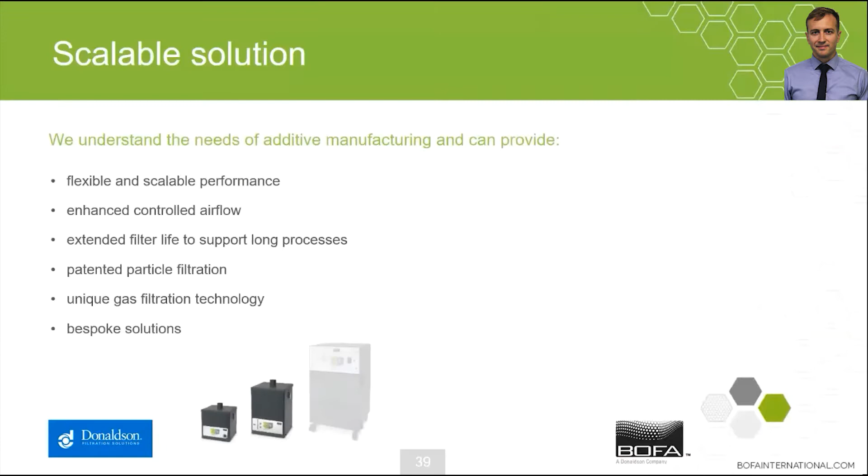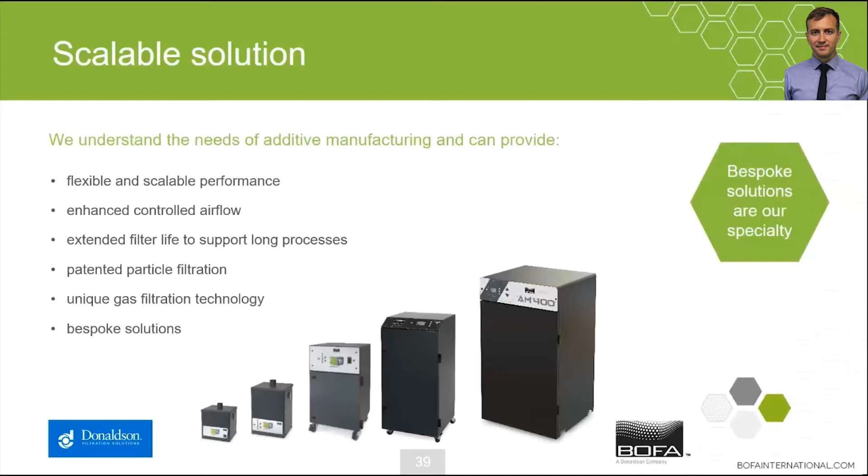So BOFA has a huge range of products which provide a huge range of solutions. We understand the needs of the additive manufacturing industry. Our extractors are currently in the hands of experts and OEMs, to whom they're providing valuable solutions for a growing set of problems. The current range utilizes known technology from our other proven products, such as controlled airflow, patented filtration designs, and the BOFA standard extra long filter life. We are able to offer scalable and customized solutions.

Since we've already discussed the different process types, I'd like to give you a little bit more insight into the product ranges which serve them.

Firstly, the 3D PrintPRO range is designed specifically for the additive manufacturing market. Our patented deep pleat duo filters give extra long filter life against the particles produced, increasing your productivity. The activated carbon technology we produce is best in class for gas filtration, for absorbing harmful and unpleasant odors, with large beds, as Josh has described, to provide longer uptime.

Finally, we are using, where possible, our IQ technology, which accurately sets and maintains gas flow rates whilst delivering an unrivaled quantity of system information, both to the user and any interfacing machine. This consistency in flow control is invaluable for maintaining print quality, keeping the flow regime constant even as your filter fills and the system pressures change.

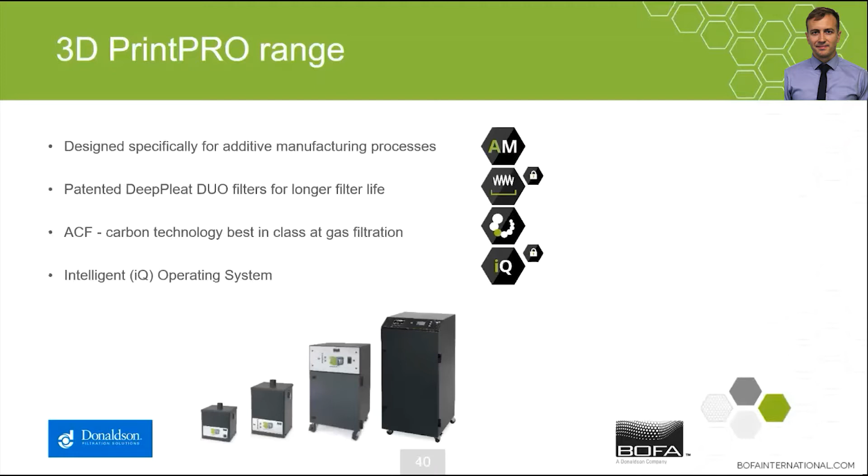The 3D PrintPRO 2 has the lowest flow rate of the range and offers cost effectiveness, a small footprint, and a long filter life. It is best used for open framed printers, as it comes with a specially designed stay-put arm to hang over the printer frame and get close to the source of emissions.

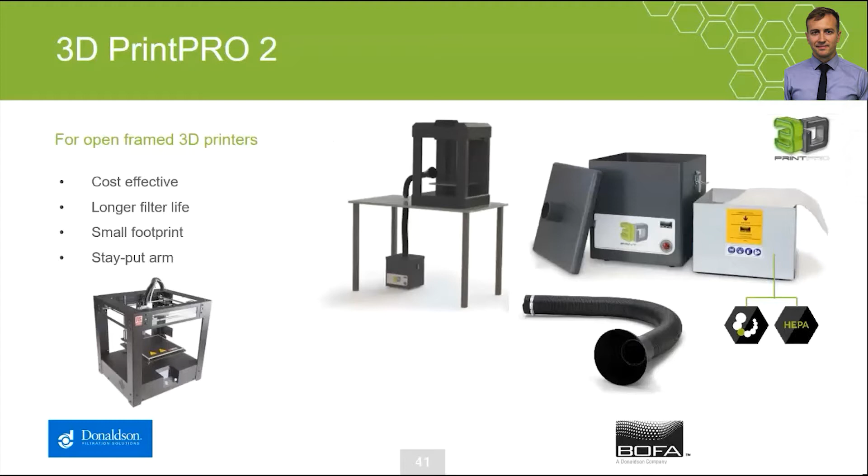Going up a step, we have the 3D PrintPRO 3. This unit is the most common choice for filament-based printing, but can also be used for vat polymerization and other gas-releasing processes. The 3D PrintPRO 3 has speed control, which further extends the life of the filter, and you can add a return spigot for a closed-loop setup that helps keep the temperature of the print chamber steady. It comes with a number of options depending on the customer, and is applicable in the same environments as the 3D PrintPRO 2, but also some larger, more industrial targeted printers.

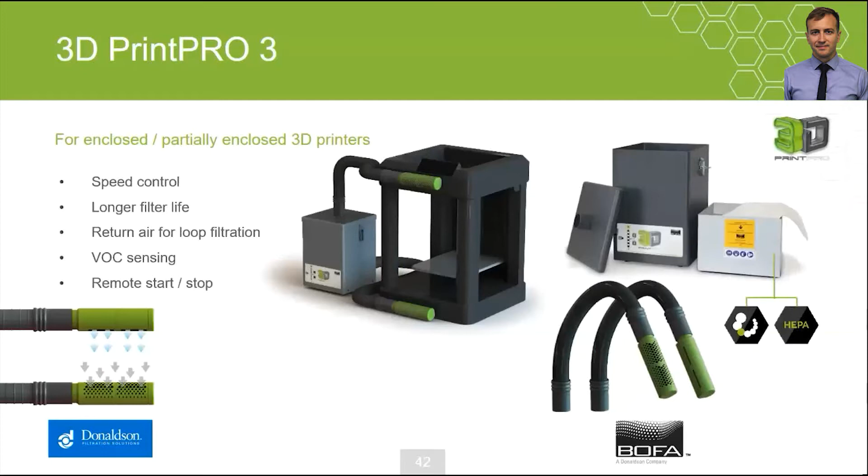3D PrintPRO 4 is another step up. This unit offers the same features as the 3D PrintPRO 3, but is scaled for higher airflow speeds and filter life. This extractor is best used for large chamber printers and high off-gassing processes. So now you are entering the world of high-end industrial machines, with complex prototype parts being created frequently, but also small-scale production printers. Again, this unit will work with most printer types and capture both types of emissions.

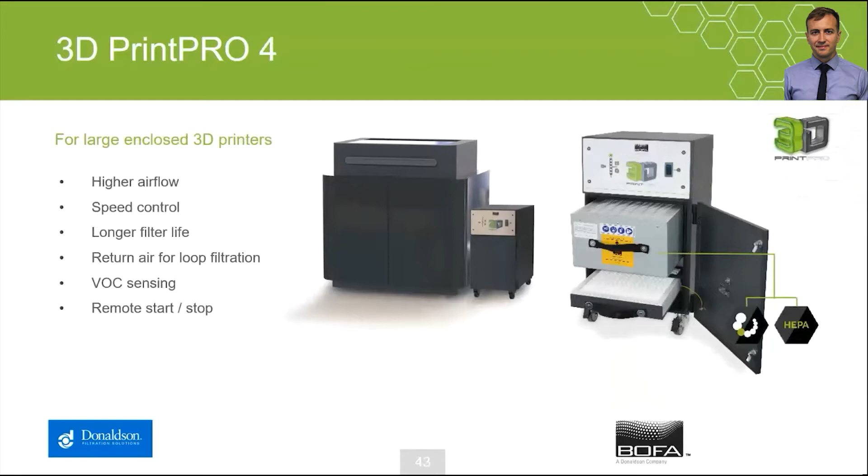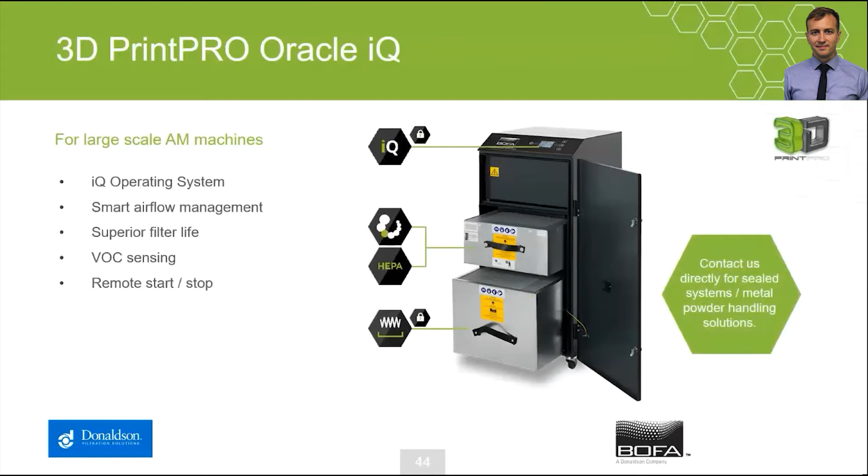Next is the Oracle, our best-in-class extractor. It is the choice for industrial-level additive manufacturing. The IQ operating system and smart airflow management give superior filter life and performance. As previously mentioned, the market-leading IQ control board adjusts the pump speed based on the system resistance, providing a stable flow regime regardless of filter saturation and other variants downstream. It can be fitted with a VOC gas sensor and integrated with the printing tool to optimize the process through use of analog control.

Next up, we have the Fume CAB 1000 IQ. This cabinet is equipped with the same filtration technology as the Oracle just mentioned, but it also adds an enclosure, so one can complete some post-processing of printed components safely in the cabinet, for example cleaning and some light depowdering. This has proven to work well for photopolymer solutions, such as SLA and DLP.

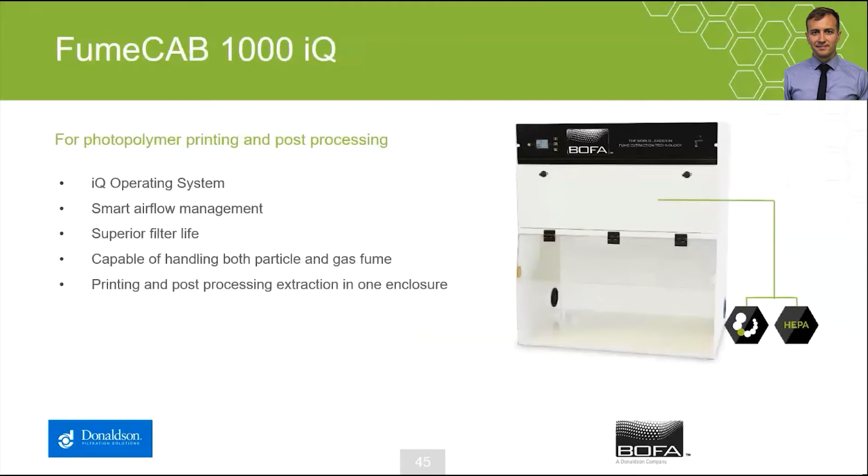So finally, our newest addition, the AM range. Unlike the 3D PrintPRO range, the AM range of products is designed for the sealed environment of AM printers and to deal with dangerous powders, as mentioned before. As these processes often run in an inert atmosphere to prevent oxidation and pyrophoric events, this range is designed specifically not to leak out expensive inert gas or leak in harmful oxygen.

It comes with the high performance BOFA filtration and iQ flow control, but also ergonomically handles the riskier filter change process associated with these industrial 3D printers, providing a completely sealed, removable housing which can be taken to a remote location for safe passivation of its contents. This extractor range is suited to much more production-based, higher value printers.

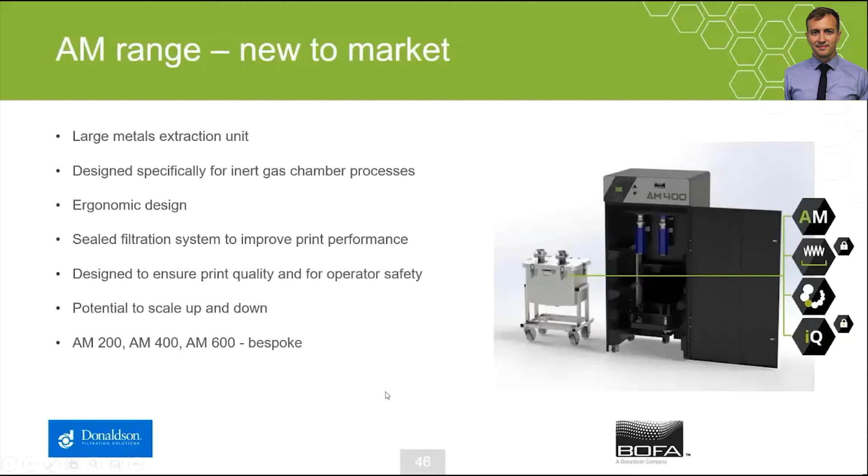Photopolymerization and material jetting printers can take advantage of the 3D PrintPRO 3, 4, the Oracle, and the FumeCAB. And the industrial level processes such as SLS, SLM, binder jetting, and DED can be integrated with the new AM range, the Oracle in some circumstances, the FumeCAB, or a bespoke solution that meets your specification.

So you can just get in touch with one of our fine salespersons or product managers if you think there is an opportunity we can help with.

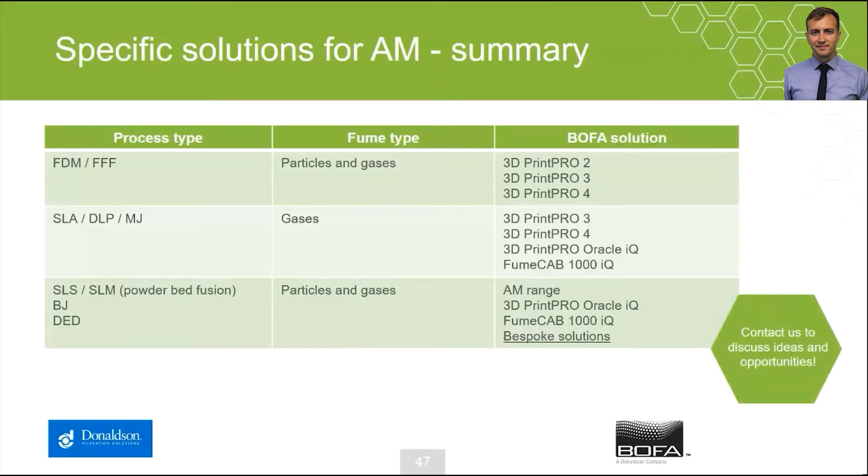So speaking of fine salespersons, Luke, can you talk us through a way of matching our extractors to printers? Sure, Ross, thank you. One of the ways we want to support our distributors is to provide an easy way to integrate our extractors with any printer in the market.

If a printer doesn't have a dedicated extraction point, we can help by creating a custom printable nozzle or spigot. The project is always ongoing, and we are building a database of custom connections. We want to make it as easy as 1, 2, 3. Download, print, attach.

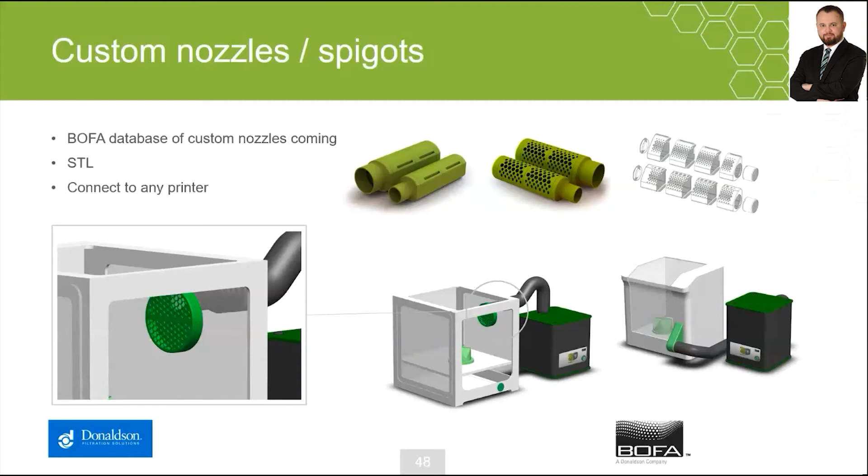BOFA's 34 years of experience brings another strength to the table. We understand that processes and machines may need a unique approach. This is why we offer bespoke solutions. If your printing tool needs a special filter, more airflow, or a totally different approach, then we can do it.

A bespoke BOFA extractor to meet your needs can be designed, built, and delivered quicker than you think. If you need a bespoke solution, please get in touch with me after the webinar and we can discuss the details.

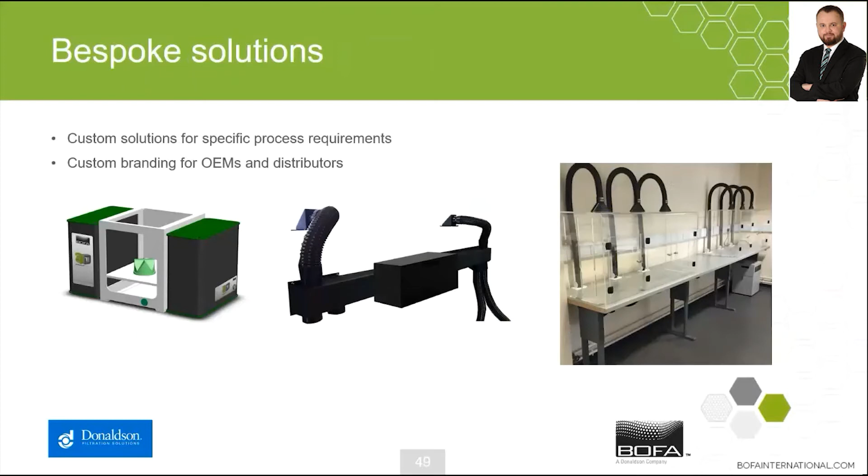As mentioned earlier in the webinar, BOFA invests heavily into R&D, especially in the AM sector. I'd like to ask Ross to please tell us a little bit about what the future may bring.

Of course. So, as is the case in most industrial markets, automation and scalable production at low labor costs is a common topic within the AM sector.

BOFA already has analog interfacing capabilities on nearly all of our extractors, allowing the host machine to turn the system on and off, and receive multiple status alerts such as filter blockage and VOC breakthrough alarms. This is a comfort to those users who don't have the ability to attend to their extractors until absolutely needed.

Further to this, BOFA have for some time been developing our new Industry 4.0 control systems for our extractors, IQ2, which has the ability to communicate to host systems in all field bus communications protocols. We plan to carry this technology back to the rest of the range, offering digital interfacing and total control solutions to a central location.

The industry continues to investigate more complex and advanced materials, so this offers new challenges in terms of filtration, and we are at the forefront, gathering evidential data and proving our solutions are effective. Working with our parent company, Donaldson, we are running material decomposition and filtration efficiency testing on the latest high temperature materials to give you peace of mind that regardless of what you're printing, you're safe.

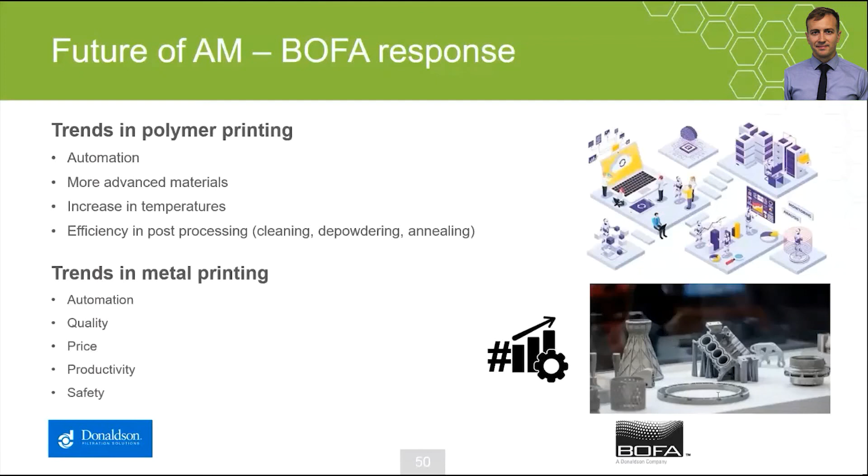We're also looking at how to expand our portfolio and serve in other areas, providing better solutions for problems outside of the printing, for example, depowdering and heat treatments. We continue to focus on safety, not only in removing airborne hazards, but also the thermal and ergonomic issues relating to the filtration and handling of metal powders. All the while, BOFA continues to improve our internal quality, be competitive on price, and challenge ourselves to improve both our products and our services to the customers.